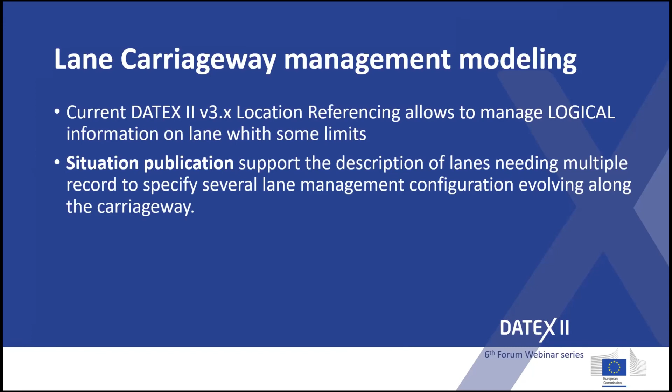Lane carriageway management modeling: the aim is to implement a further vision with respect to the current location referencing vision, which allows managing logical information on lane, but with some limits. The current situation publication, for instance, supports the description of lanes needing multiple records to specify several lane management configurations evolving along the carriageway. I'll explain it later. If you use the current model for managing different lane management configurations, you need several situation publication records.

The application of having precise lane status information is real and is generated more and more in specific road management use cases, such as dynamic lane management through the lane control system—specific VMS specialized to manage information on lane transitability, the way you should drive on each lane. This is also managed in hard shoulder management, which allows the hard shoulder to be transitable or not depending on specific road conditions, mostly managed in combination with dynamic lane management itself.

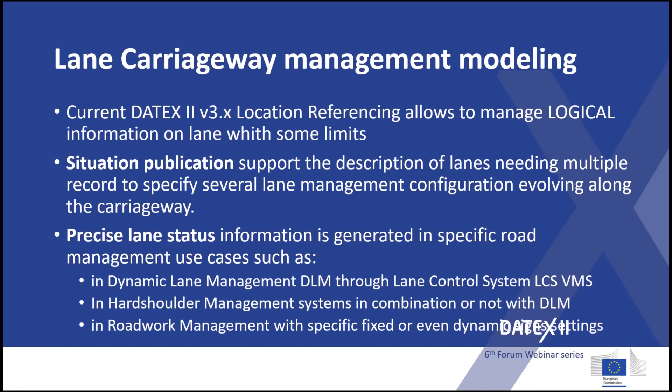But also in common roadwork management, like in the picture shown by Joseph in the previous presentation, we have specific fixed regulations for each lane, which are managed by static signs put on the road by the roadwork to place the roadwork.

So the goal of the model has been to optimize information management with location details coding the exact lane management information—a logical lane description and logical information about the driving rules on the lane. This has been done with total reuse of the current location referencing model developed—sorry, this is not ISO, it's an EN 16157.2—and reuse of the traffic regulation model, the current METR traffic regulation model shown by Joseph.

The applications are optimized and accurate information description for dynamic lane management, hard shoulder management, and roadwork zones, aiming to deliver the information most suited to in-vehicle information, potentially usable from the vehicle in ITS services. I mention here the DENM messages, roadwork management use cases.

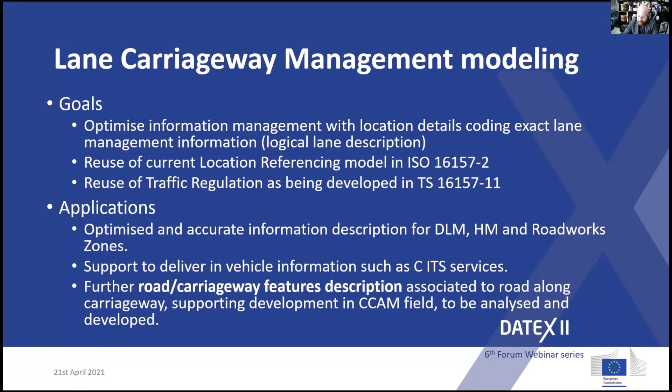Further road carriageway feature descriptions associated with the road are being developed. There are in the CCAM field some more features associated to the road, to specific lanes and sections, which will be explained in the following presentation. It's interesting to understand how this model could support this information being delivered, so this is something to be further analyzed and taken into consideration for the future.

This is the lane management currently available in DATEX 2 version 3. We have a location—the location referencing information that is mostly for situations in a network location, which may be both point or linear location. Point location is when the situation record is relative to one specific location, and linear has an extent.

There is also one possible option of having a supplementary positional description, which gives further detail, because the point location and linear location depend on the standardized way of location referencing—we may use GML string or GPS coordinates, but also ALERT-C or TPEG location referencing or ISO linear location referencing—but they don't have sufficient detail for managing all the information we need, so we added this supplementary positional description, which is linked to the carriageway of the road in that place affected by the situation, and the specific lane.

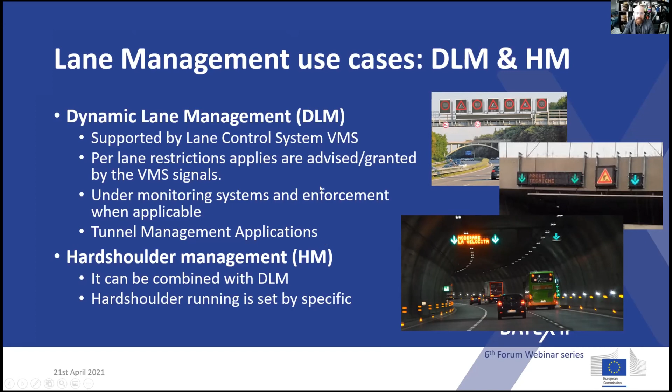But it should be well described: dynamic lane management and hard shoulder management application. There are two stretches that are managed in a different way. They are independent, but they are part of the larger, huge Bologna area where we manage the dynamic lane management and hard shoulder management.

So you see here the motorway, which has 3 lanes, managed by the lane control system. The other place is an open road, not a motorway, where the management is on the internal carriageway where the motorway is.

You see these are lane control systems, done by a pictogram with a speed limit or other information, and the traffic light for the lane. This is the traffic signal for the lane, which shows whether the lane is open, deviated, or closed.

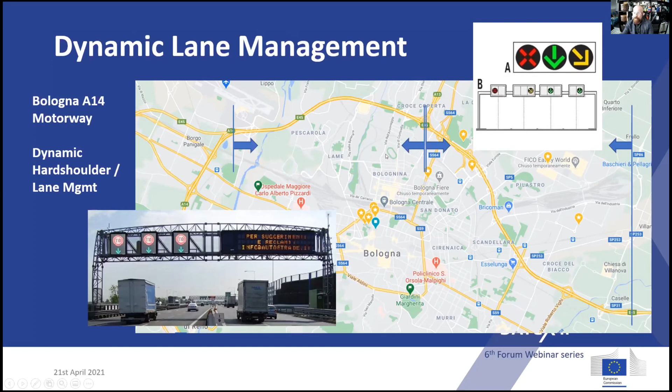So we have 2 segments per direction, we have 4 segments. We find some naming conventions for this management.

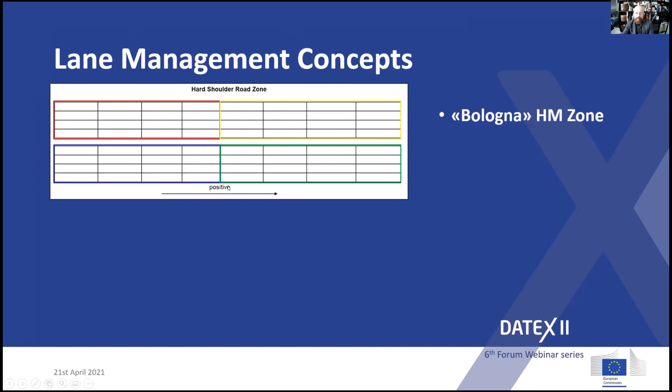We have a zone: Bologna area hard shoulder management zone. We have 4 segments, 2 per direction, each with consistent hard shoulder management possibility. So we switch the hard shoulder only per segment.

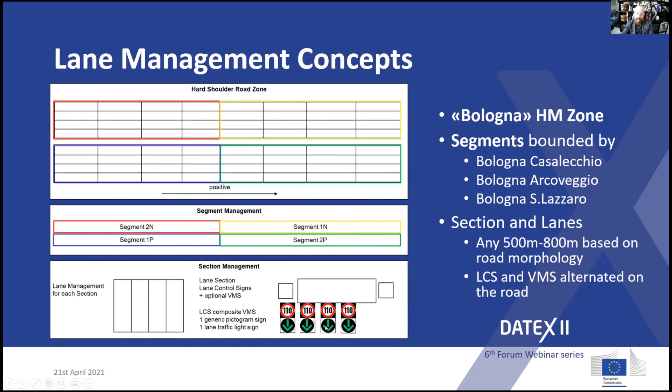After that, here I have all the lane control systems along the motorway, shown for each section. We introduce the section definition. A section is managed by an appropriate lane control system, and alternatively with a VMS to reinforce the information, which manages the lane status very precisely.

These are placed every 500, 800 meters for instance, based on the road morphology, and LCS and LCS plus VMS are alternated on the road. So: zone, segment, section, and lanes. These are the hierarchy of the information level management.

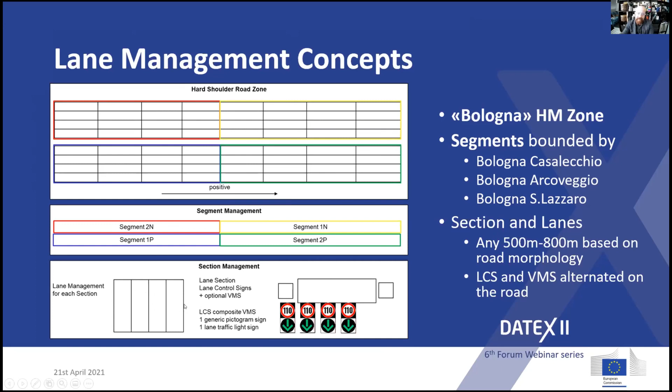This is an example of the normal condition of the road. This case is 3 lanes plus hard shoulder, so it's 4 lanes when the hard shoulder is running. We have alternating sections with or without VMS, and lane control systems on any section. So we can switch and control the regulation for any of these sections based on the lane control system.

For instance, normally we have a condition of no heavy goods overtaking in a section, so heavy goods vehicles are only on the running hard shoulder or on the first transitability lane, which is also mandated by this sign, which does not allow transitability for heavy vehicles in the lane. Speed information is also very important to manage the traffic flow and enable a smooth flow on the motorway.

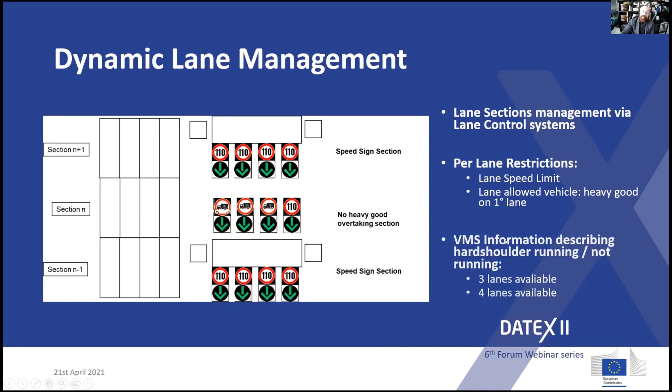So, lane speed limit and VMS. When something happens, there is an automatic control which switches the lane control system to manage it. The first thing is setting a hard shoulder when there is an accident or any emergency situation with safety issues.

And then we protect the accident area, deviating the lane and closing the lane at the accident position, managed by the section. So we have speed reduction in operation, and we have the accident closing the lane, which has been previously deviated in a reduced speed management. And also the normal VMS gives information about the accident approaching.

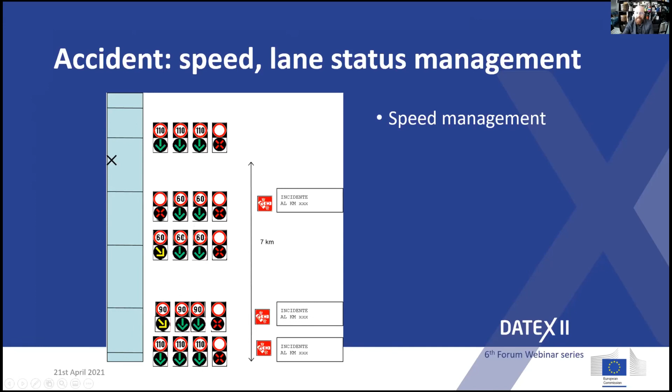So this is a specific lane management for each lane, achieved by the lane control system. The other use case is the roadworks that has already been shown by Joseph.

General roadwork management along the road implies lane management, of course. Depending on the road configuration and number of lanes involved and closed by the roadwork, several options are available. The lane can be closed, deviated, reduced, or used in an alternate one-way traffic, or reverted, as we'll see later.

The number of lanes leads to several options of lane combination, and there are specific rules to be applied for different road types. The road manager knows that if they have 3 lanes and have to make roadworks on the emergency lane, or the first transitable lane, or the leftmost transitable lane, they should apply different road configurations.

For this, we have specific guidance, which is defined by the road code. The road code is then applied in different motorway or road sections based on the number of lanes. So this is specific, precise information that is applicable when you close, for instance, a 3

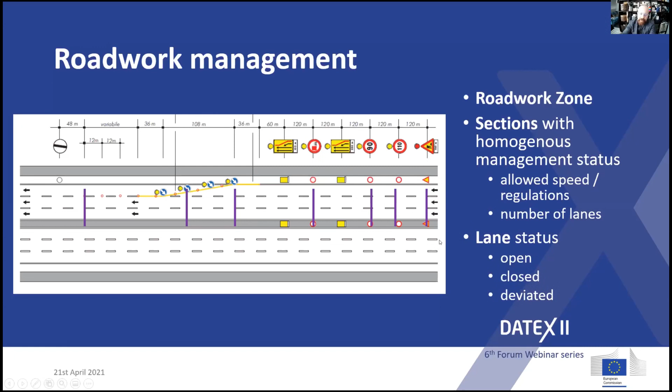We call this section as we had in the lane control system. Here they are managed by specific static signs set at the roadwork. The lane status is open, closed, and deviated.

Then these are some different roadworks that can be seen. The road perspective, this is the specific regulation. So we know that if we want to operate such closure or deviation, we need to put in place such regulation for each section and at a specific position.

So this is an array of sections, one after each other, which are delimited by specific intermediate offsets, and they have an extent of some meters.

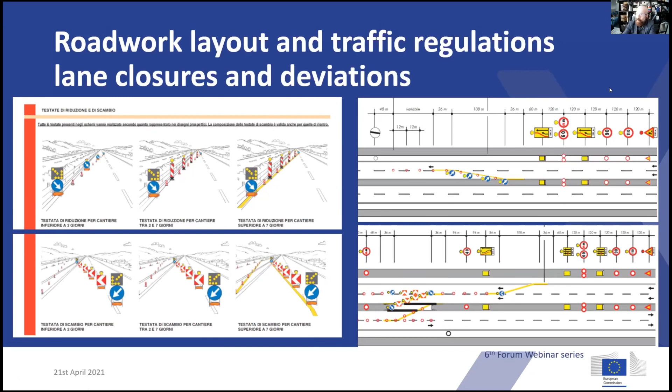And you can arrive at managing also very complex situations. Here, near a junction, you have a lane that is deviated to go in a direction, and the other lane is passing to another deviated lane in another carriageway. So here you have very complex situations that are also merged with this junction.

In this model, we manage a logical configuration of the road and the logical status of the road, not the physical, because the physical layer is to be linked to the map, to the cartography, and we have connection and input from the studies and standardization process undergoing in this field for GDF, from which we had some inputs and will keep taking more, because we need to associate this cartography information to the logical management we are describing here.

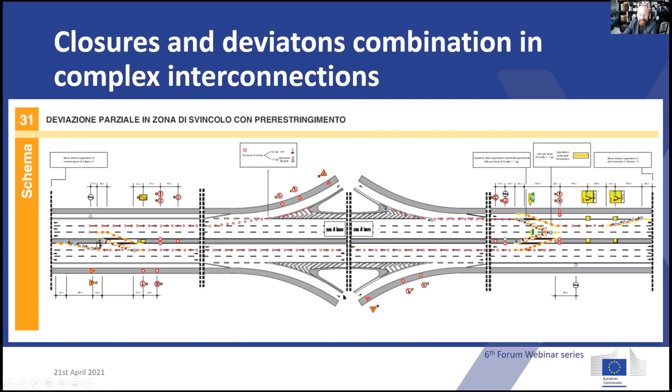And this is a future project that is undergoing in our domain. So we did this modeling with the DATEX 2 methodology based on reuse and our experience management, and this is the thing.

Both for roadworks and dynamic lane management, our lane management model supports what I would call a natural description of the road along the road, as it's seen developing on subsequent sections. For instance, if I am a vehicle moving along, I see all these sections one after the other in my direction, optimizing the lane status information management based on the assumption of this structured location referencing per segment, section,

and lanes. That reminds me also of something: if any one of you is used to traffic flow TFP TPEG messages, they have this concept of giving information in an array of what I would call sections that are specific length segments, sections of 500 or 1000 meters, one after each other.

This describes the carriageway and lanes and their status as set by road sign, VMS, LCS. We have a dynamic lane management table publication that specifies how the road is managed, which are the lane control systems that are set along the motorway for dynamic lane management applications. And then there is a lane management publication which gives the information in real time on the management itself.

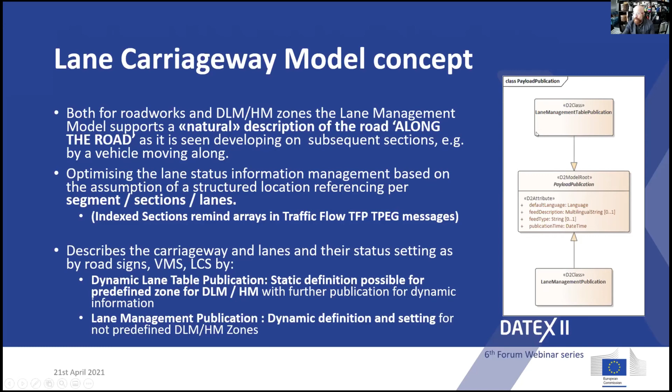The table is used always when you have a specific sign that you set in the road for the dynamic management. When you have roadworks, you manage only the dynamic information. We'll see. So, lane management table, this is the model. The model represents the concept that has been explained. There is a table. A table is used to manage the zone.

The zones are one or many. We have Bologna, we have the Milan area zone. Any zone identifies its segments. You see both the zone has a location reference, because it's normal to have a location reference, and the segment has its specific location reference. And here I would say that a specific location reference would normally be a linear location reference, but we use a pointer to location reference to allow also predefined location delivery. So it's a linear location reference.

The segments are connected. So from one segment I pass to the other segment, and I can specify this driving to, driving from. After, we have sections, and here the sections are identified by an index, which is the subsequent number in which I find them in the road in the specific direction of the segment. And then the index has the section length, and there is an offset, of course. These are defining the structure of the road in that part. Let's go a bit further.

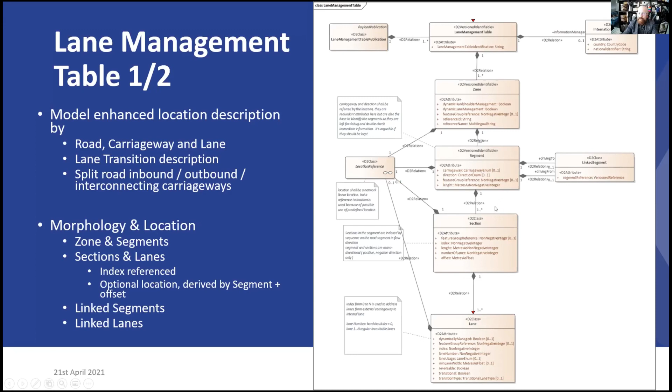So this is the structure of the road, in which we add also other information, because we have devices in the segment, section, and lane that are dedicated to segment management information, to the section information, the LCS normally, and the VMS beside any section, or specific lane information, because any lane is controlled by one specific VMS.

Also device: I put device here because we don't have only VMS, we also have traffic measurement sites, traffic cameras, speed cameras, or anything that could be put in this complex architecture of the dynamic lane management, and so the device is a generalization. This hook class allows to plug in VMS or measurement site data or speed cameras or whatever.

We have the same information here, which is a feature. The features are the characteristics of the road. That can be managed in two different ways. We have the feature, which is a single feature which applies to the segment, section, or lane, and can be specified here as a feature. But when there is an applicable feature group, because the same feature applies to the whole section or to all the lanes, it could be much more optimized to describe the feature group that is applied to any section or to any lane.

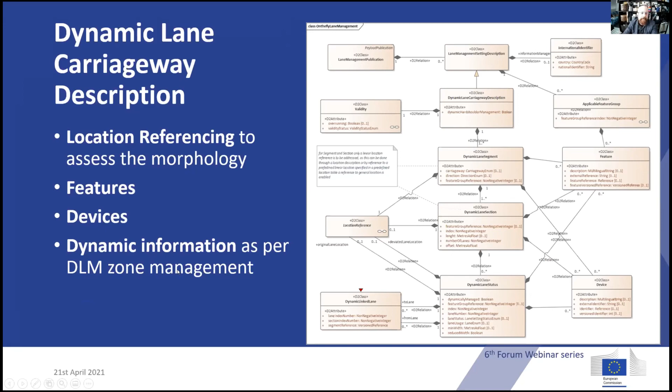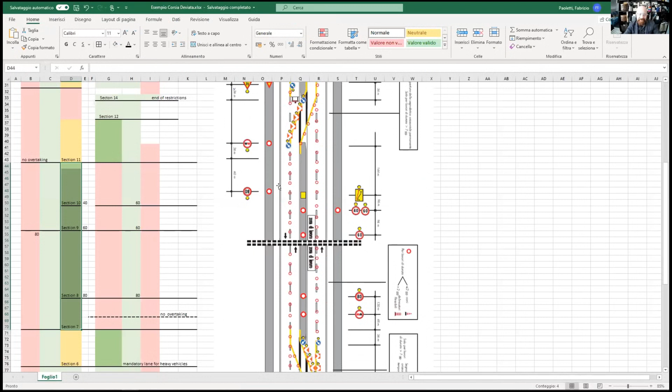So I won't resume, but this is the specific section management. Any section has a speed and speed reduction deviated, and we introduce this deviated to left and the section reversed, open to traffic in the opposite direction.

So I have the conclusion slide only to resume that we had done this huge work on modeling to manage specific use cases, but we think that we delivered a compact optimized model to derive, for instance, the information in the best suited way for C-ITS, DLM, Roadwork, and IVS messages. The model will be published as a proposed starting model and should be assessed against other possible usages, and better merged and unified with the traffic regulation model as well, describing also possible road features and devices along the carriageway, and let's see how this could be also used to support other features.